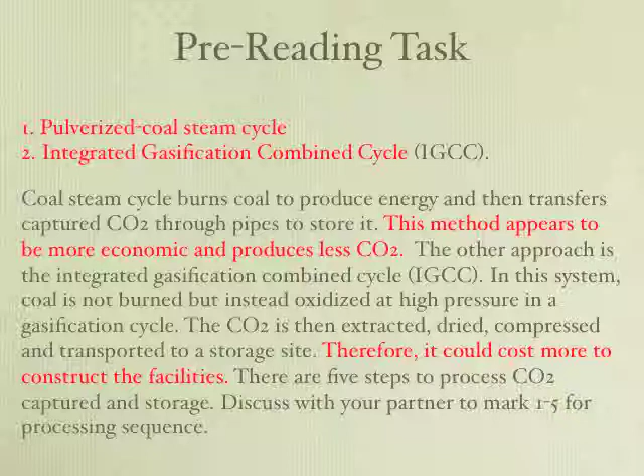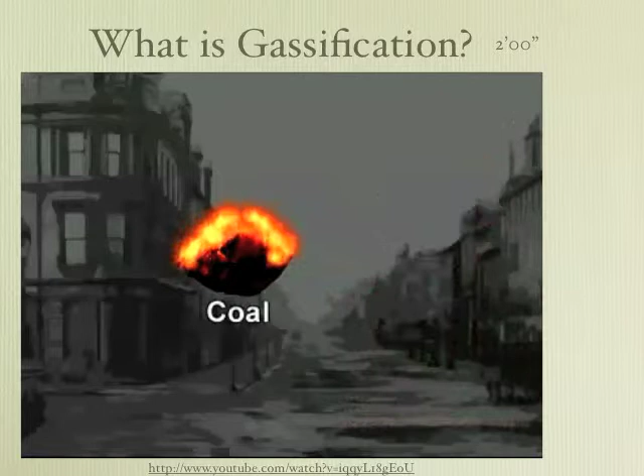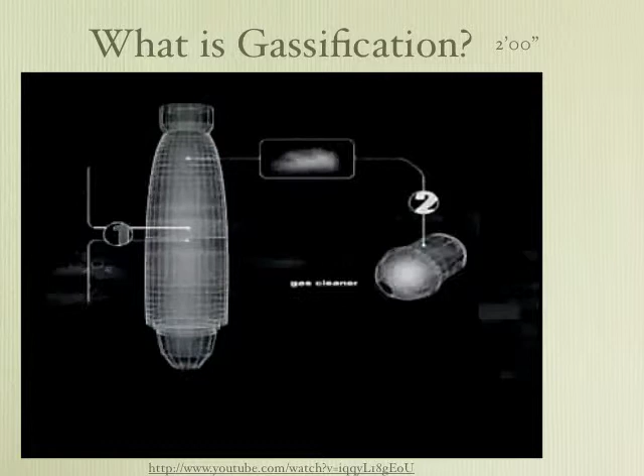Introduced in 1792, gasification is a process that converts coal and other carbon-based materials into synthesis gas, or syngas, which is a mixture of carbon monoxide and hydrogen. Once processed, coal gas can be used as a versatile ultra-clean fuel for generating electricity, manufacturing chemicals, and as a fuel source for vehicles in the transportation industry.

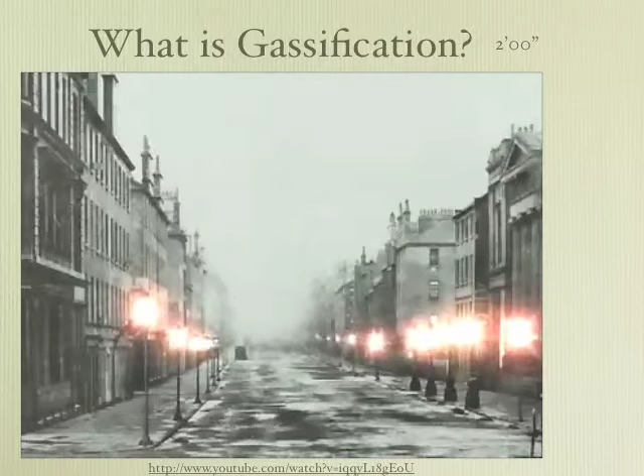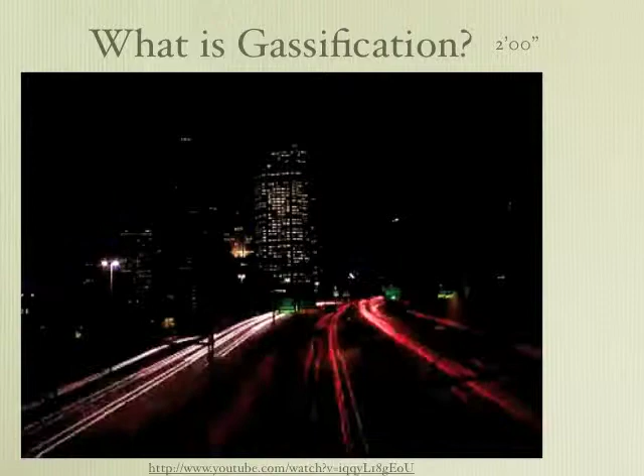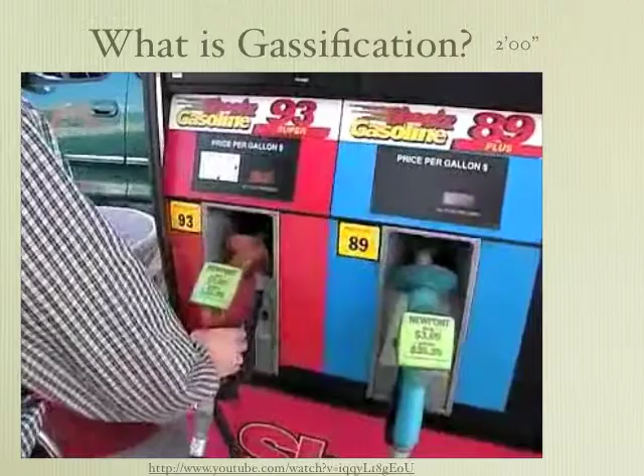In the 19th and early 20th centuries, coal gas was used to illuminate street lamps, warm homes and businesses, and power industrial steam engines. By the 1960s, coal gas was replaced by oil and natural gas as our nation's primary suppliers of power, heat, and light. Modern gasification technologies, diminishing supplies of oil and natural gas, and the rising cost of these fuels have renewed interest in producing coal syngas as a desirable alternative.

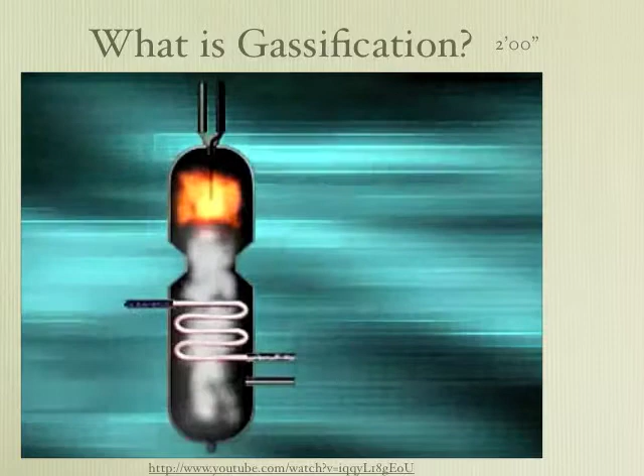In the modern gasification process, coal is fed into a gasifier and exposed to steam and oxygen at high temperatures and moderate pressure. Under these conditions, a series of chemical reactions occur that break the coal down into its base components: hydrogen, carbon monoxide, sulfur, and mineral impurities.

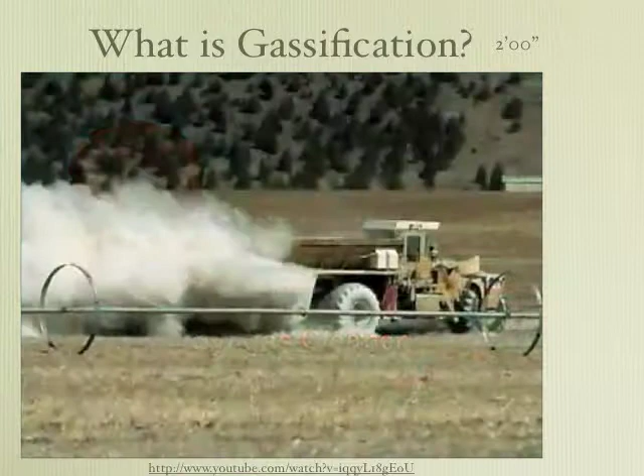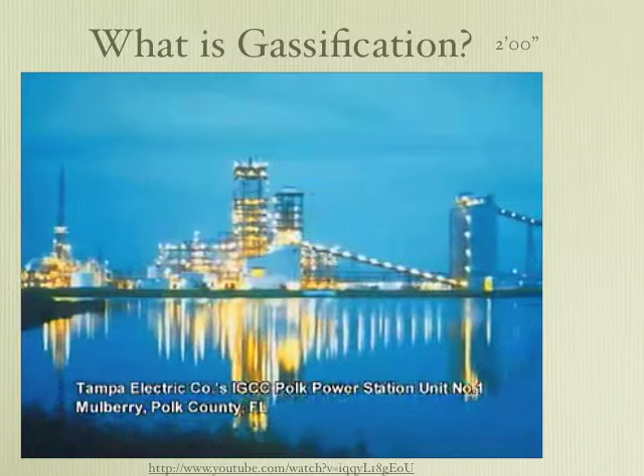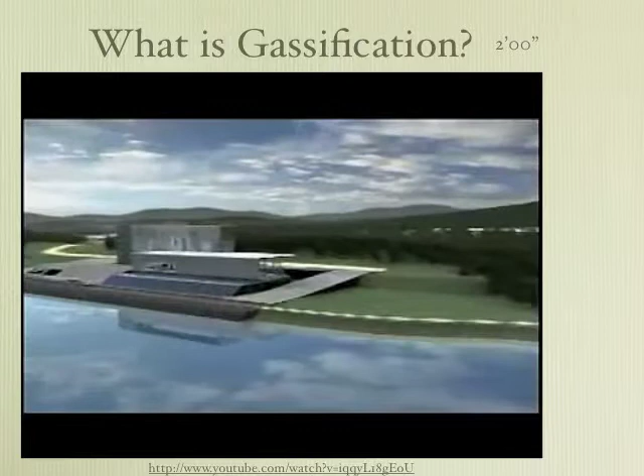The syngas is then cleaned to remove these impurities, which can be used to produce fertilizers, construction, and road building materials. Coal syngas is used in a modern turbine power plant called an Integrated Gasification Combined Cycle, or IGCC power plant, which is today's environmentally preferred method for producing electricity and manufacturing chemicals. IGCC gasification is the primary technology component of FutureGen, the Department of Energy's zero-emissions power plant.

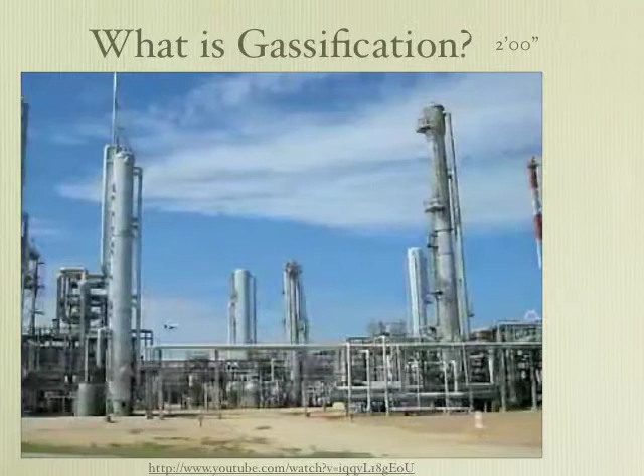Coal syngas can also be used to make synthetic natural gas for home heating and industrial use, to produce hydrogen and other transportation fuels, and as the base component in chemical processes that create a multitude of everyday products, from plastics, solvents, and adhesives, to cosmetics, artificial sweeteners, and pharmaceuticals.

There is another, much cleaner way to create electricity from coal. It's called Integrated Gasification Combined Cycle, or IGCC. Instead of burning coal directly, IGCC first converts coal into a gas.

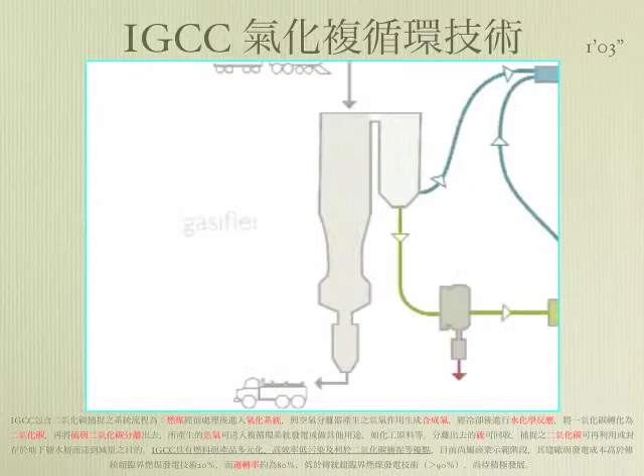This synthetic gas, or syngas, can be thoroughly cleaned, removing a large percentage of the pollutants that would otherwise end up in the air. The syngas is then burned in a state-of-the-art turbine generator.

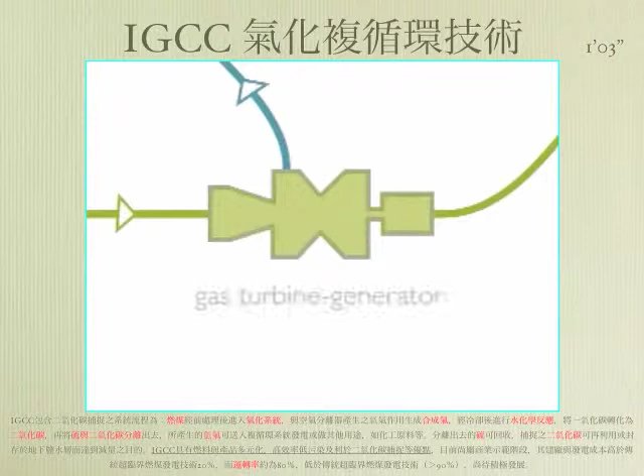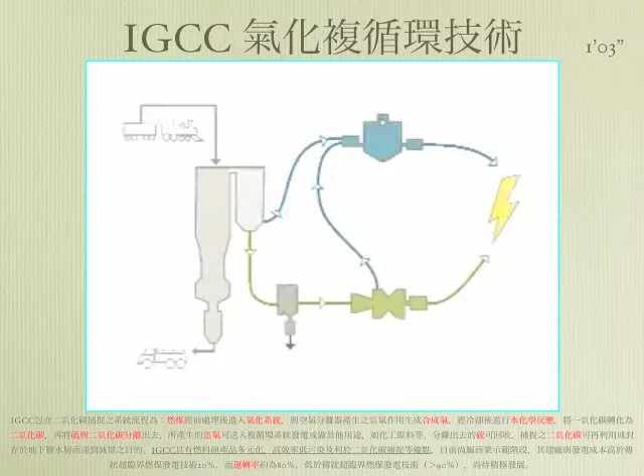Excess heat from both the gasification process and the gas turbine is converted into steam and used to power a steam turbine generator, producing even more electricity. Most important, given our concern for global warming, IGCC technology presents the ability to capture and store carbon dioxide, to sequester it, instead of releasing it into the atmosphere.

Some of the biggest names in power plant engineering are promoting IGCC. Imagine how effectively we could reduce carbon emissions all around the world by embracing this technology.

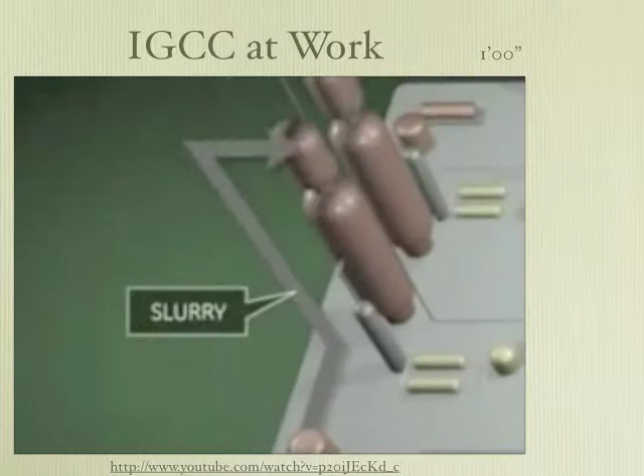The process begins with coal entering the system, mixed with water, creating a slurry that has the consistency of heavy oil. The slurry is injected into the gasifier along with oxygen, where it is heated to very high temperatures to produce synthesis gas, or syngas.

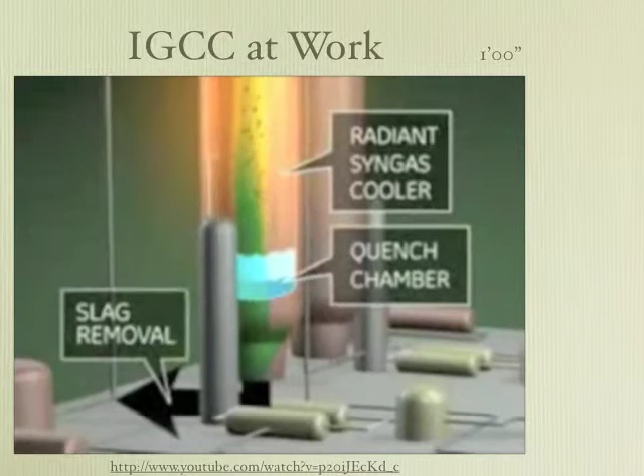The hot syngas is fed into the radiant syngas cooler. Heat from the gas is transferred to the high-pressure steam system for integration into the steam power production cycle of the plant.

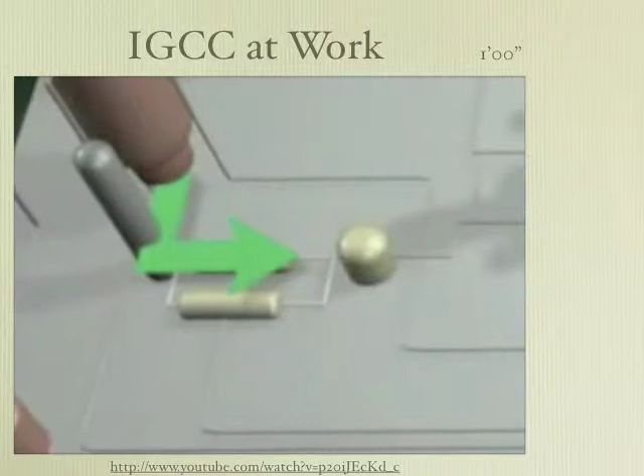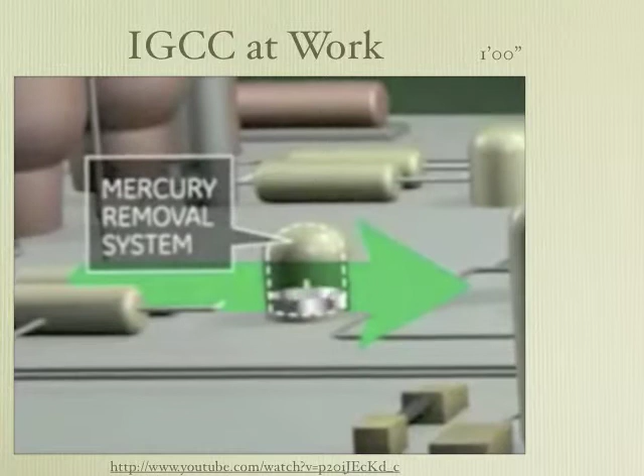The syngas moves to the low-temperature gas cooling system, where more heat is extracted for useful work. The syngas passes through an activated carbon bed that removes mercury. Once it leaves this area, there are almost undetectable amounts of mercury.

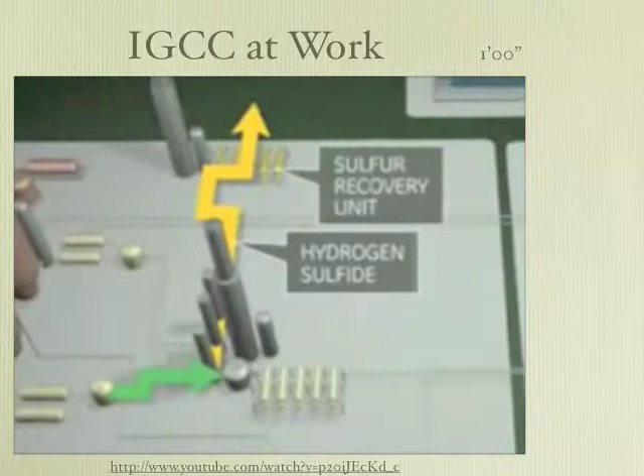It then continues to the acid gas removal process, where hydrogen sulfide is separated from the syngas and later converted into elemental sulfur that can be used in chemical processing.